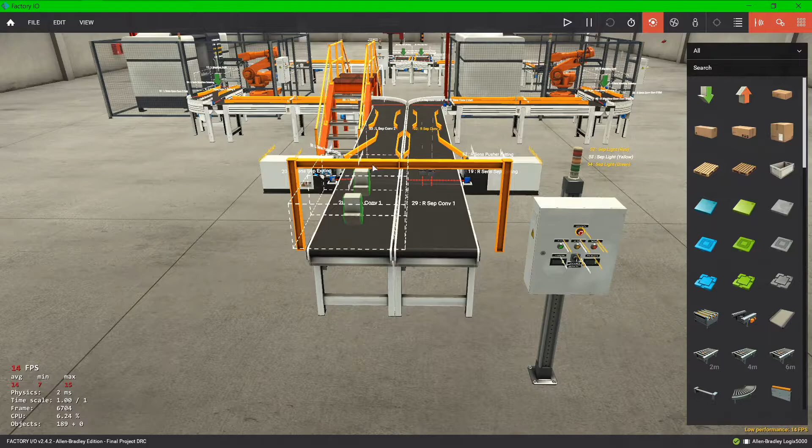But after a long time, we finally figured out this would work the best. It probably took most of my time on this project, just trying to get it to work. I probably should have scrapped it earlier on, but I chose not to.

So we'll try and get this thing started. Now that I got some stuff reset, alright. When you press the start button, it should automatically emit 2 parts, start this conveyor, test whether the part is plastic or metal, and then separate the plastic parts on the left side and the metal parts on the right side.

And if you have it in manual mode, it should only do 5 parts. But in auto mode, it should fill up this conveyor all the way up to the machine. Hopefully it works and we don't have any latency issues.

For some reason, this is... yeah, I don't know what it's doing. Sometimes it'll work perfectly, sometimes it won't work.

Other problems I had were that the conveyors look level, but they're not actually level, and sometimes that'll mess it up. Sometimes the parts will get caught in here. I had quite a few problems with the separator - it's probably the most problematic sequence of this machine.

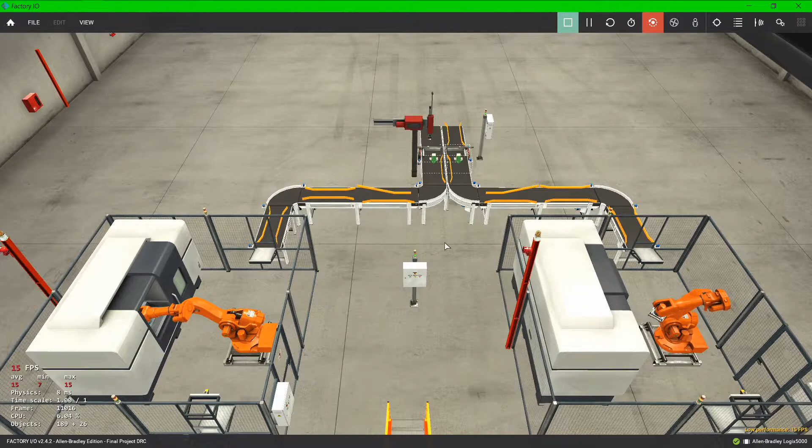It'll pause the separator and all these conveyors, and then once both these machines are done, it's going to come over here, drop a lid off, and then drop a base off, and then these conveyors are going to take it all the way up to this pick and place.

I still have some issues with this pick and placer, because for some reason the graphics won't let me put this thing all the way up against there like it should be able to. For some reason it doesn't allow me to do that.

Right now it's not working apparently - this is going to be a fail. Oh yeah, so apparently it's not working in auto mode right now, so I'm going to have to switch this over to manual mode to show you basically what it's supposed to do.

And then it clamps it, shuts the conveyor off, picks it up, comes over - it doesn't come all the way over because of... and then shoots it off the end like that. And then should I re-shut the conveyor off?

Apparently I forgot it - this one's still got problems with it. Didn't get fully done. Yeah, I didn't get this one fully done, so it still has some problems with it.

But the reason why it doesn't allow me to extend this all the way over and set it directly on top is, for some reason, this graphic here will not let me scoot this any closer, even though this doesn't move at all.

So let's show you my programming. We have my main program, which has my emergency stops. They're all wired together. And then my selector switches for auto and manual, they're all wired together too.

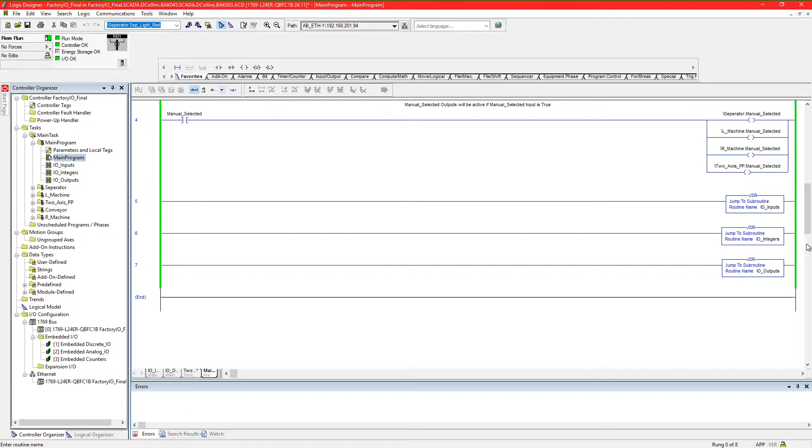Then we've got my JSRs, which jump into my inputs and integers and outputs: inputs IO map, integer IO map, and outputs IO map.

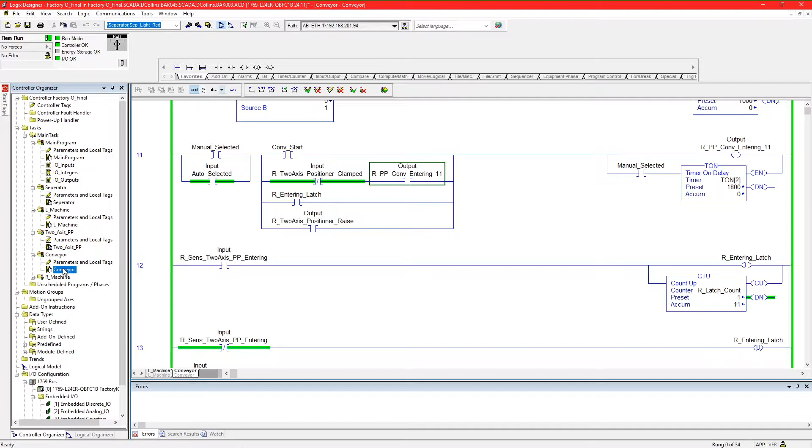And then I have my separator program, my machine program, my two-axis program, and then my conveyors in between the machines—these 3 conveyors and these 3 conveyors, these 3 and these 3, actually it'd be these 4, are all in that conveyor program. Thought it'd be easier to separate them up.

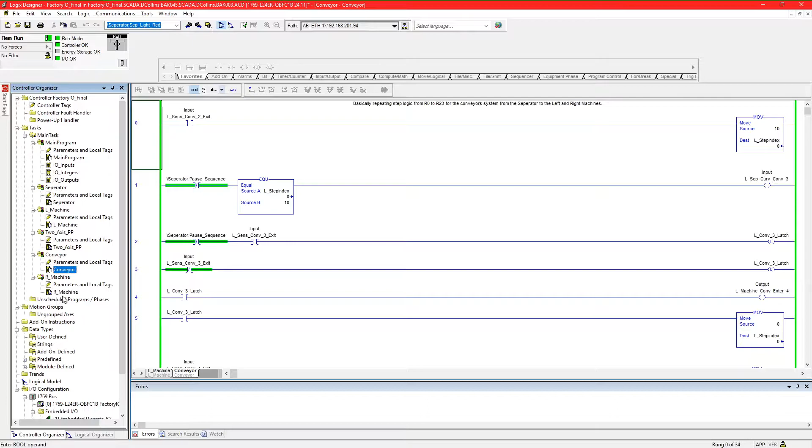The L and R machines are basically the same program. The only difference is the right machine has a delay on it before it starts, so that they would start and stop or unload a part at the same time. If the part goes in at the same time, they'll unload at the same time.

That was my plan anyway, to try and get these 2 machines sequenced so they would unload at the same time to make it easier for this machine. But there are some little tweaks in here that I would have to try and fix, which I don't have time anymore to fix.

Basically that sums up my final project. I mean, I would have rather worked hands-on for the final project because I learn better hands-on than trying to work with this software. There are some little glitches in the software and the conveyors and stuff that was giving me problems too, that I had to work around.

It wasn't too bad, other than I did learn a lot. That's about it.

Did create a parts list for this—like my capacitive sensors and inductive sensors, there's 2 of each, so technically 4 sensors on here, both located right here on this bar. That's what detects if the part is plastic or metal. And then diffuse sensors, that would be all the little blue sensors down the conveyor, these little blue ones here. And then the emergency stop buttons, the start buttons, and the lights, and the buzzer.

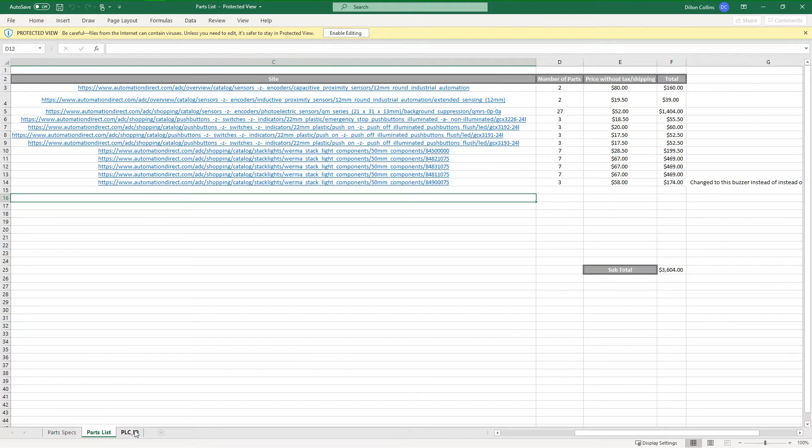So I pretty much quoted all of them out, so just for that stuff would be around $3,604. Then I have my PLC IO map in here also. That's about it, nothing else I can really do because I kind of ran out of time.

If I could change one thing about building this, I definitely would have, right at the start, kicked this idea out and had the 2 parts automatically load into the machines, then machine out the lids and bases, and do pick and place just like this—except I would make this pick and place so it actually places directly on top of it, and then do a packaging system over here. That's about it. Gave me a lot of problems.